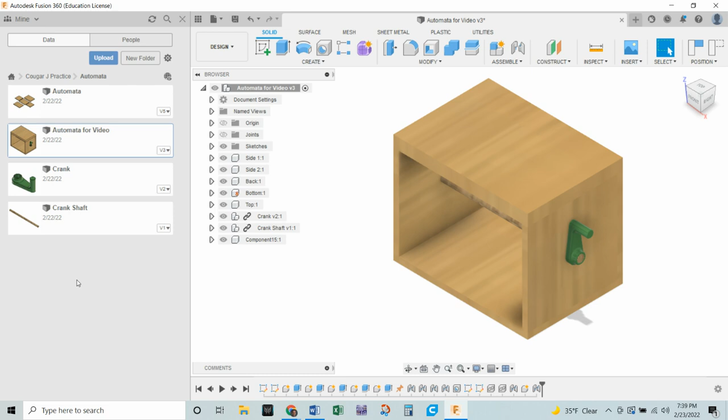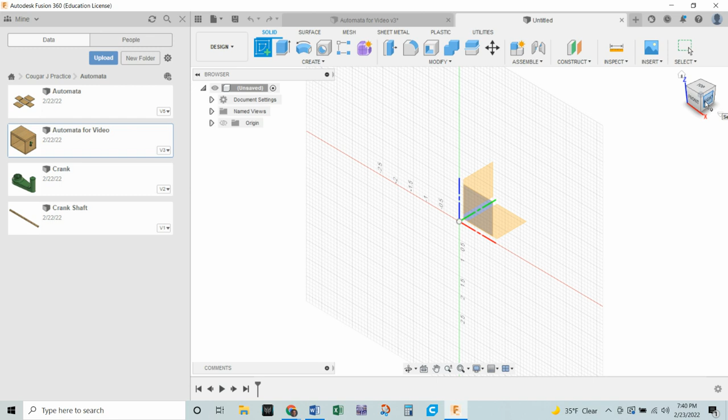So while you are in your Automata project, we're going to make a new design. We don't really need to make a new component here, so we can go ahead and just start on sketch. Now, because our front view is the opening on our box, it's best if we do the right side view, either by clicking on the view cube or clicking on that spot on those 3 planes.

If you like the grid, great. I personally turn it off. So our first one is going to be not really a cam at all, it's just a circle spinner. So we're going to start by creating a disc.

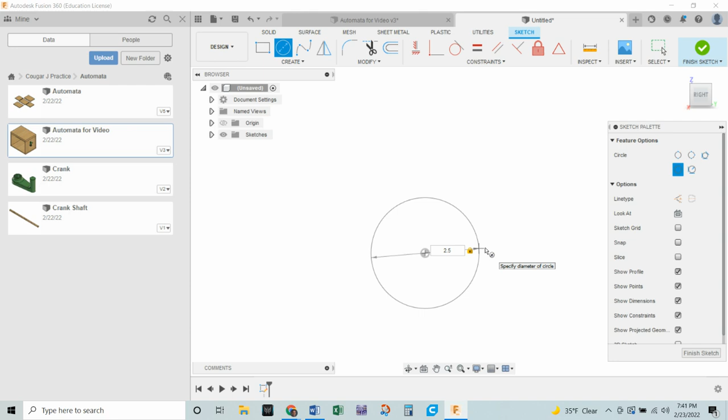Now we have 4 inches of space. What we make this is not really that critical, but let's go ahead and just make it 2.5 inches, seems to be a good size for this. So we'll make that circle 2.5, and there will be another concentric circle right in the middle that is the size of our shaft, for us is 5/16.

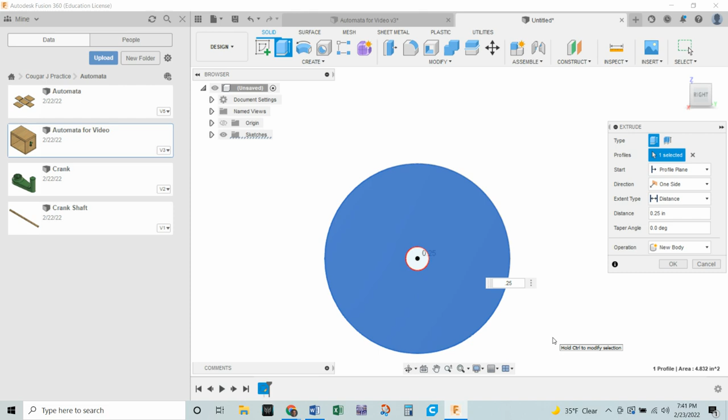If you're watching this video, you may have something different. And then finally, we can finish our sketch and extrude that part to 0.25, that's about the approximate thickness of the material that we're going to use.

All right, so we have our first, let's call this circle cam, even though it's not really a cam, but we'll designate it as a cam anyway. So we're going to save this and call it circle cam.

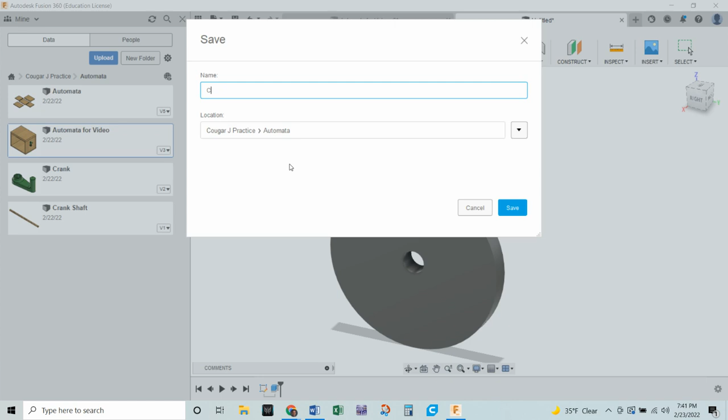Now, we're going to go in order of difficulty here. That's the easiest one to make. The next easiest one is going to be this polygon cam, because we don't really need to do any parametrics to it. So let's start a new file again.

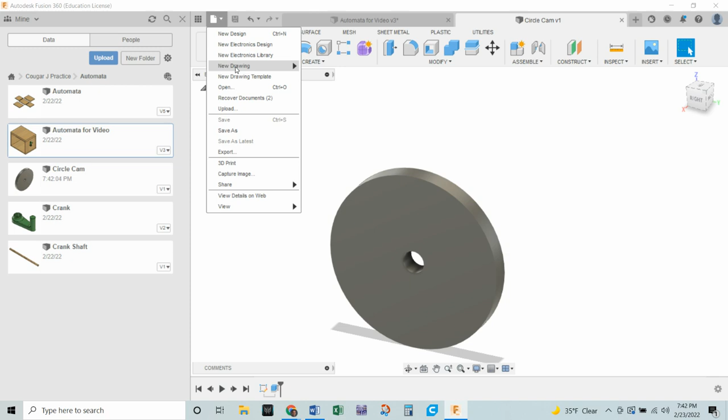I'm going to again sketch in the right side view, and this time we're going to create a polygon. Now, in the drop-down menu, we want an inscribed polygon because we want to know what the maximum diameter ever could be to the points.

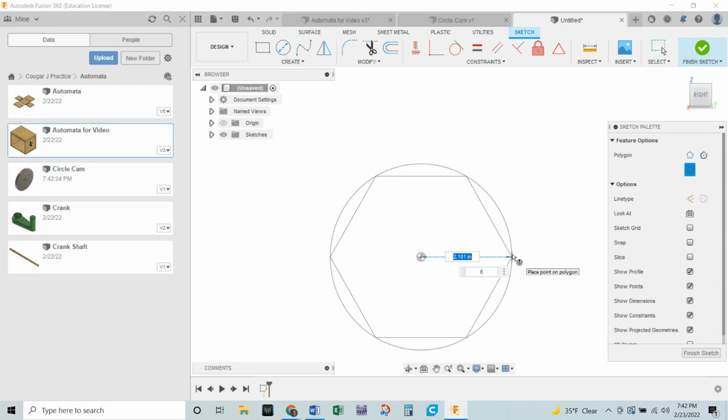So when we get an inscribed polygon, we're going to pull that guy up, and as you pull with your mouse, go straight right, it'll kind of snap to head towards the right. And again, now we've got a radius this time instead of a diameter, so we're going to make that radius 1.25. Now it already is a hexagon, which is what we want.

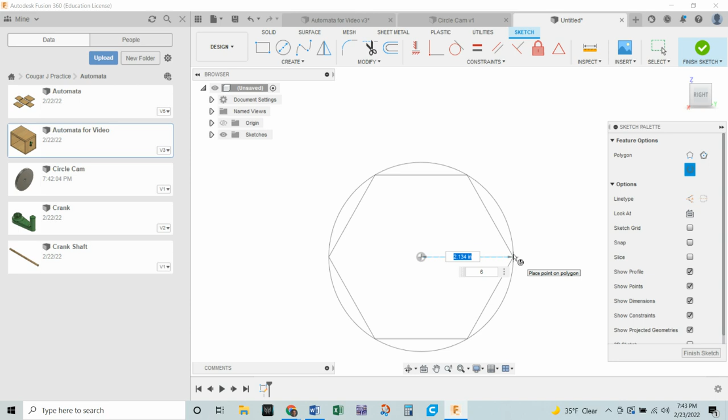Tab goes back and forth. We could make it a 9-sided or a pentagon, but we do want 6 sides, we want a hexagon. Tab gets us over to the dimension, so we want that radius to be 1.25.

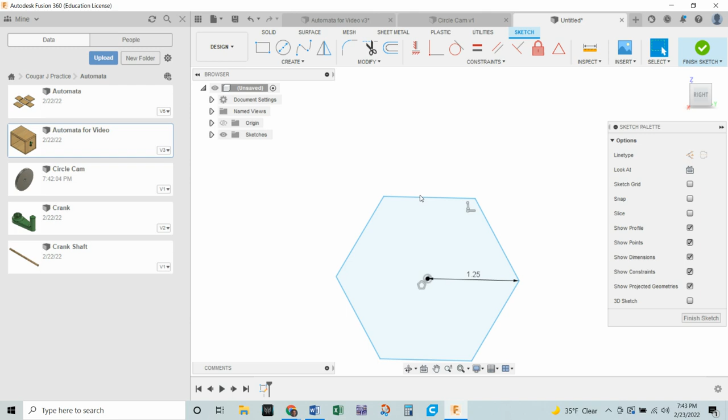All right, now normally this would be black, but the way polygons work is you can actually move them around. So in order to fully constrain this, come up to your horizontal constraint and just snap on that line. Actually, you might have to hit the line first and then hit horizontal, and now it locks it down and makes it fully constrained.

Second thing we're going to do is put that 5/16 hole in the middle again, or a circle that will represent that, 5/16. Enter, finish our sketch, and extrude again to 0.25. And we have now our polygon cam.

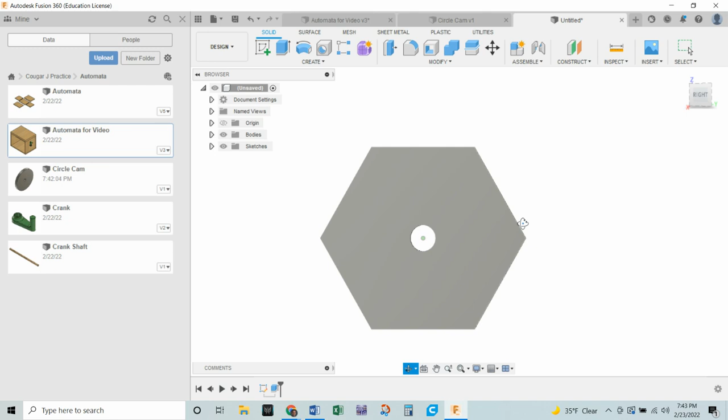So again, save, polygon cam. So far so good.

All right, now the next one's going to be a little different and take a little bit more time. We've built this one, we've built this one. Now you'll notice that this one is called, that it's got parametric dimensions.

Parametric means that when we're doing parametric modeling, para means near or next to, metric means measurement. So we're going to put measurements next to each other essentially and have one relate to the other. So that's what this means. So let's talk about how this works.

You'll notice right here we have this through hole, which is going to be 5/16. We want that to be 5/16 no matter what. We've got a diameter here that I want to be, I'll call it 2 inches this time, and we can play with it a little bit later. And then the distance between this point and the center point of that circle is going to be the diameter divided by 4. So here's how we're going to set this thing up.

Let's start by again creating a new design.

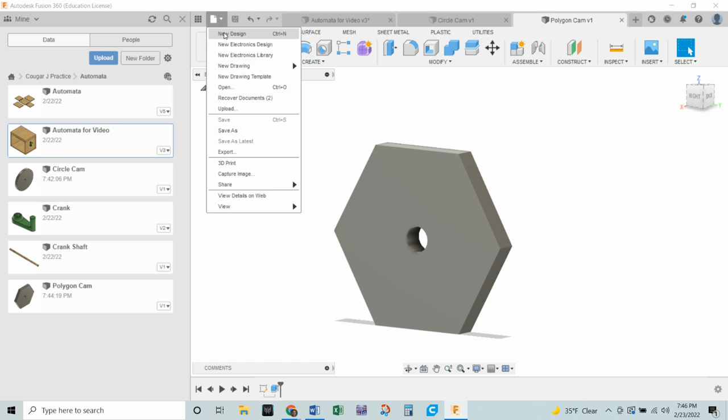Okay, now while we are in this new design, we're going to do something a little bit different. Let me get rid of my library here. Under the Modify tab is Change Parameters. We're going to click on that, and that's going to open up this Parameters window.

Right now we haven't done anything yet, so there's no parameters in here. We're going to create a couple of user parameters by clicking on this little plus symbol. Now we need to enter a name. So the first one's going to be easy. In the curriculum, they call it nominal diameter. I'm just going to call it diameter.

Our units are in inches, and now we need to insert an expression. What is that going to be? For right now, we're just going to enter 2, which is going to be 2 inches, and it's going to make that diameter 2. Now anything I refer to as diameter is going to be 2 inches.

Now we're going to create another one, and I'm going to call that hole, HOLELOC, for location. Now I need to remember that because I'm going to have to type that in again later. And what that's going to be is it's going to be the diameter divided by 4.

Now I'm not sure why that's red. Oh, because I missed an E in there. It should turn black once you've spelled it right. So I've got the diameter divided by 4 so that when I'm looking at this, yeah, that's diameter divided by 4. That's what I want.

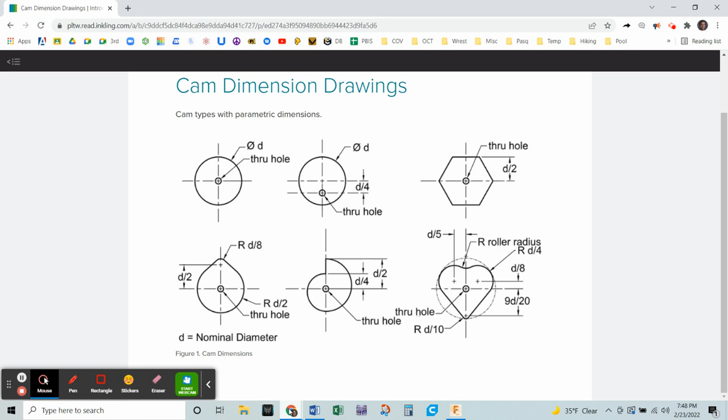Okay, and we click OK. Now there's going to be some other things in here that we're going to have too, but we're not going to deal with that right now. So we've got diameter that's 2 inches and the hole location, which is the diameter divided by 4. Click OK. All right, so here we go with actually building this thing.

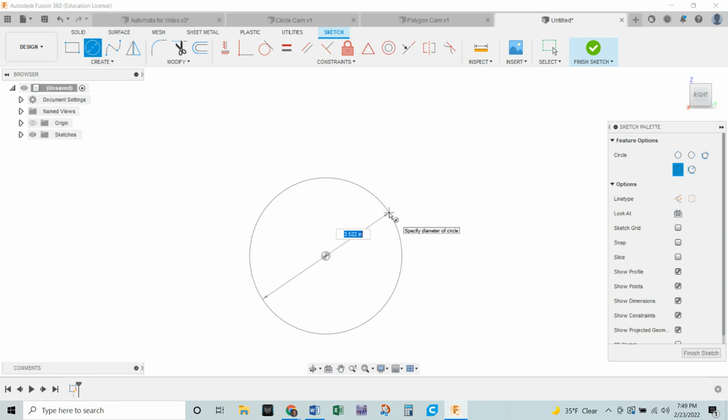Okay, we're going to sketch as we have been before. We're just going to sketch on the right. And we're going to start by creating our outside diameter hole. Instead of typing in a number on this, I clicked on the center and I'm going to start typing in diameter. It will pop up for me and I can actually just click on it and hit enter. Now this little f of x means that it's relating to that table.

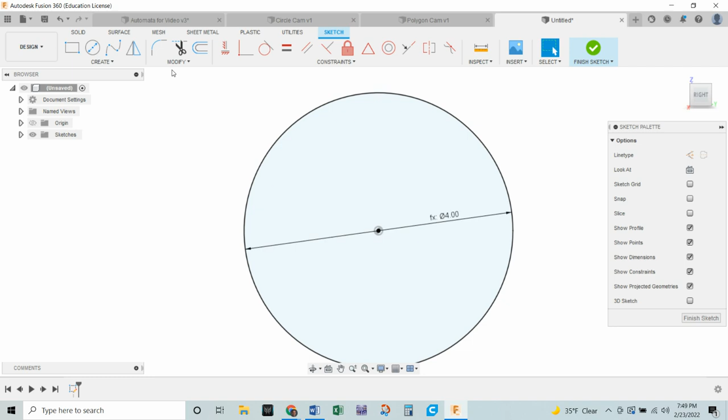If we go back to the table, we go back to our change parameters, and let's say I make that 4 inches. Okay, notice that it will change that, because it's based on the parameter table and not what I entered. So let's go back and change that. I'm going to change my expression back to 2.

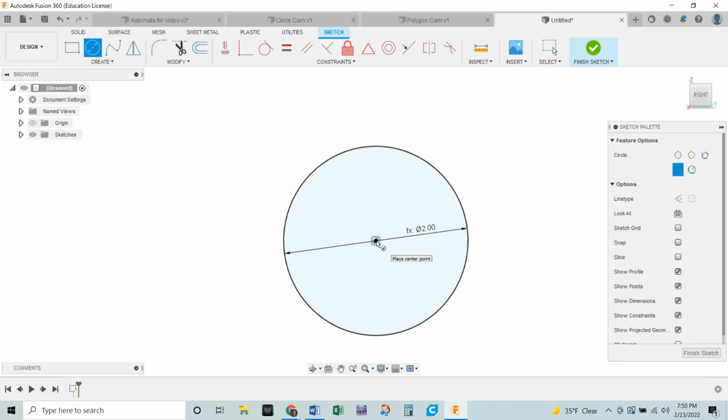Okay, and we've got that. Now we're going to create our hole down here. We're going to do a couple little things. We're going to create this hole. I'm going to hover over that center point, go down here, and of course that diameter is going to be 5/16. I don't want that to change. That's why it's not in the parameter table.

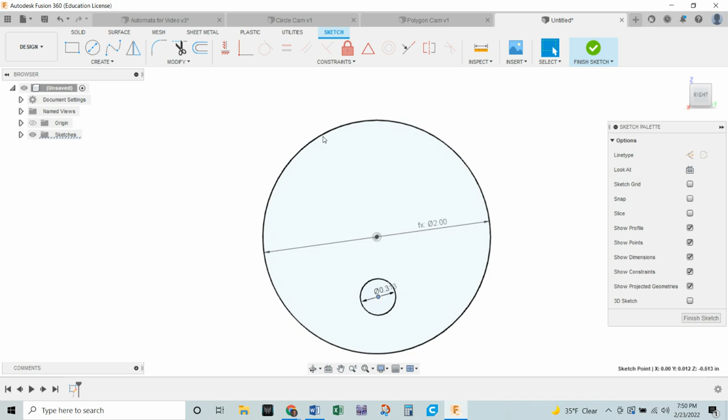I want it to always be 5/16, but I want its location to be the diameter divided by 4. But first, before we do this, remember this can move around. So let's do our horizontal constraint and vertical constraint and make the center point of this and the center point of this vertical to each other.

Okay, good. Now it's still blue because I haven't created a dimension, excuse me. So I'm not sure why it's showing that black. Oh, it's blue. All right, we're going to hit D for dimension now.

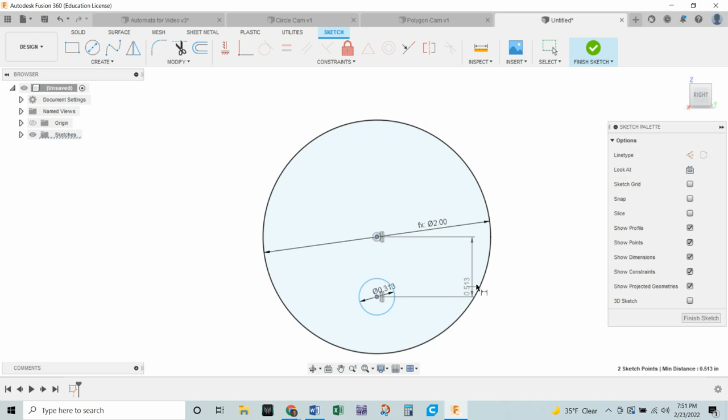And now we're going to go from here to here. Click, and that is going to be hole location. So again, once you start typing it, it'll be in there, and I can type in there, hit enter, and now that is 1/4 of the diameter.

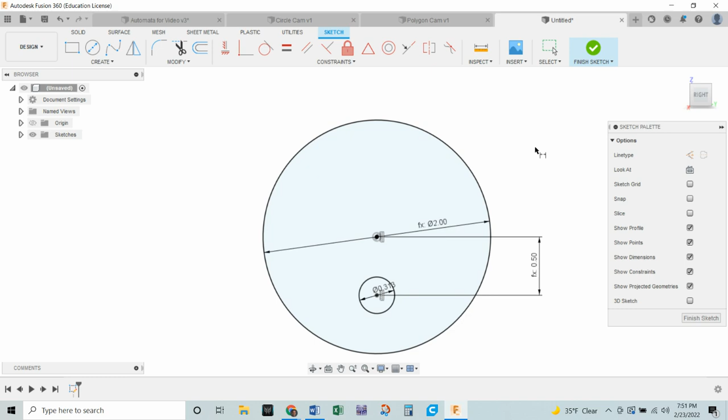Now if I want to change things, it will change it, but let's go ahead and finish our sketch, and we're going to extrude to the same thing we've been doing the whole time, 0.25, because that's the thickness of our material that we're using. Now let me show you why this is important.

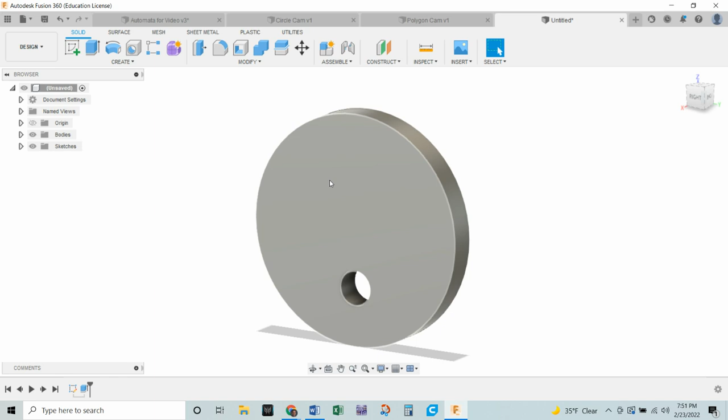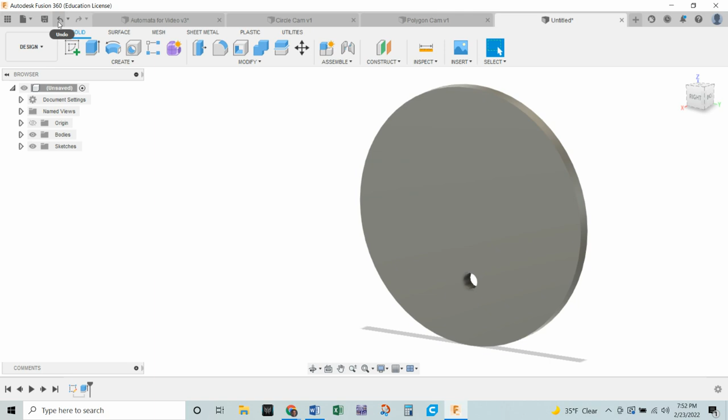Later, let's say we wanted to get a little more rise out of our riser using this cam, and we've got enough room to do that, but I don't want to change the whole thing. All I have to do is go back into modify, change parameters, and make this a little bit bigger. For demonstration purposes, I'm going to make it 5 just to show you what happens. Notice that the hole has not changed size, it's still 5/16, but its location relative to the diameter is still 1/4 of the diameter, no matter how big I make that. So I'm going to undo that last change.

We're going to save this as an eccentric cam, ECCENTRIC. This kind of moves your riser slowly up and down, kind of smoothly.

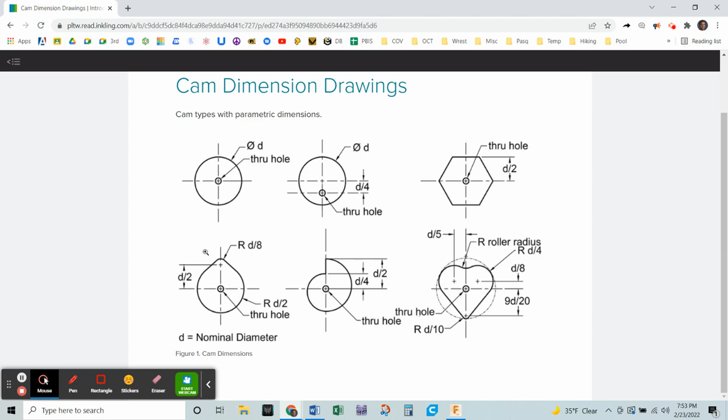All right, 3 cams so far. Time to start with our next one, which is going to be the pear cam. The pear cam's a little bit different for us. We're going to do a different design than this kind of small little nub, which will barely just lift something up. I've got a different way of doing that. We are going to have a little bit different way of lifting it, but we will make this thing work. It's a little more complicated. All right, we want a new design.

As always, we're going to sketch on the right side. Now I'm going to set up my parameter table again, but I need to think about it for a moment. All right, here we go. First of all, we're going to start off with the biggest part of the cam. Actually, first of all, we're going to set up our parameters.

Let's go modify, change parameters. We're going to add a user parameter. As we did last time, we're going to call something a diameter, and we're going to make that again 2 inches.

We're going to create another one, and you just have to trust me that I know where I'm going. We're going to call this lobe height. Lobe is the part of the cam that raises something up. So I'm going to call it lobe height, LOBEHT. Now we're going to do a little different math. We're going to make this diameter, using the asterisk to say times, and I'm going to make it times 1.5. Now, we may change that later, but for now that's going to be fine.

And we're going to do one more called small arc, SMARC, small arc, and that is going to be the diameter divided by 4. Diameter slash 4. Now I've got my user parameters that I want to use.

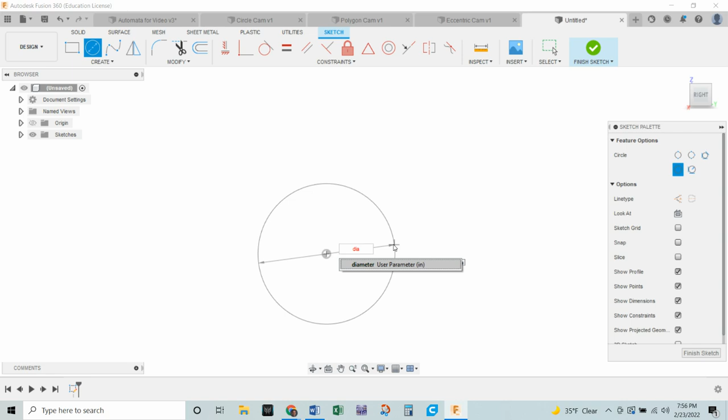Okay, so here we go. Start by making a circle. We're going to make that diameter. Once you start typing, it'll be there for you to click on. Enter. Now in the middle of that diameter, we're going to put our 5/16 hole, just like we've been doing, 5/16. We want that to always stay the same.

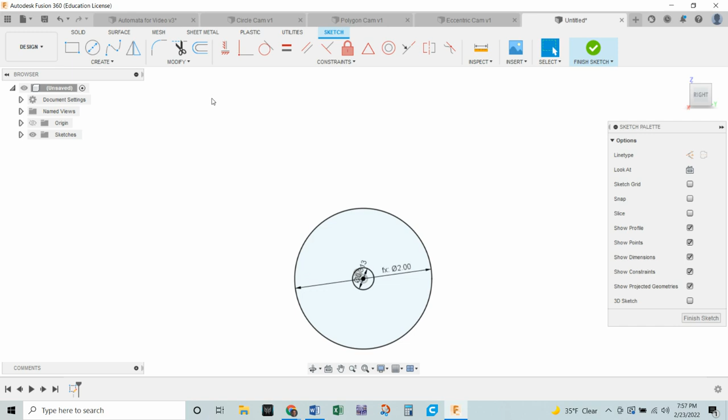Now, up here somewhere is going to be another circle. I don't know exactly where the middle is going to be, I'll put it just above the height. Now, the diameter of this thing is going to be what I just called lobe height. Oh, I'm sorry, actually I'm not doing that, my bad. I'm going to call that the small arc, I'm going to make it a diameter.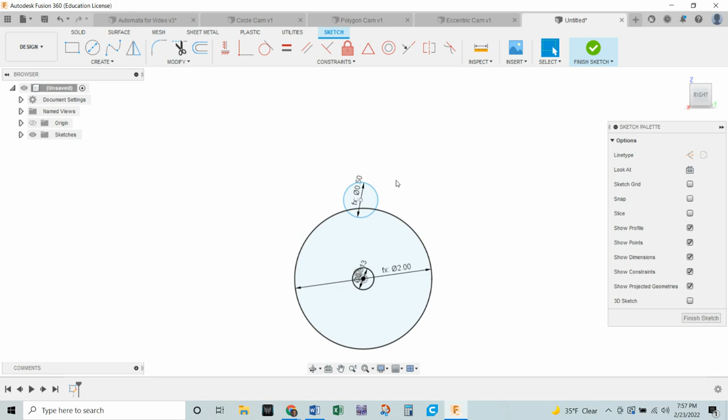Enter. Okay, now I can already tell that I don't want that to be quite that small. So I'm going to go back and change my parameters. So it's the diameter divided by 4, I'm going to change that to the diameter divided by 3. Okay, yeah, that looks a lot better.

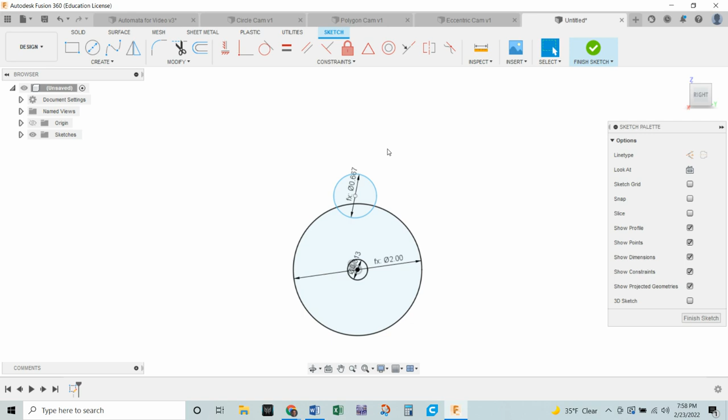All right, now before we get moving on, this is really important, because again, this circle can move anywhere. So I'm going to do my vertical constraint to make the center point of that and the center point of that aligned. Okay, now it can still move up and down though.

So one of the next things we're going to do is a dimension, D for dimension, and we're going to go from—oops, I'm making another mistake here. So another thing I want to do is I need to put a point on top of this circle. So we're going to create a point. We're going to go up here, coincident, that little X means we're being coincident, okay? And I need that point to be, again, vertically constrained, that point to the middle.

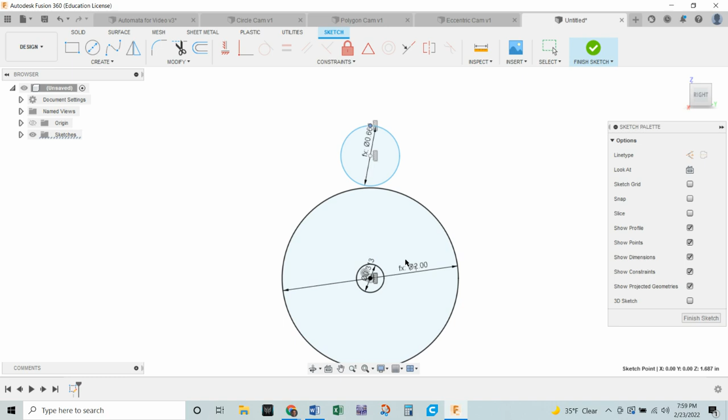I could have done it here too, but just to keep myself straight, that point is at the very top. Now I can do my dimension, D for dimension, and we're going to go from that point to the center, click, and that is going to be the lobe height.

Start typing, click, enter. Okay, that is way up there. I can tell that I did that too much. I don't think I want it to be 1.5. I think I want it to be 1.25. Let's go...

Back down here because I want it to be the diameter. This is why parameters are great. I can change just the things I want to change. Let's try 1.25.

See how that looks. That's looking a little bit better, but still I think that's going to cause us some problems when we go to work on this. Let's go one more time with modify, change parameters, okay, and we're going to call it 1 times 1.125.

We'll go 1.125, and we'll leave it at that. We can make some changes later. So this is so far what we've got. Everything should be black. If it's not, that means you didn't enter something in. You might need to go back.

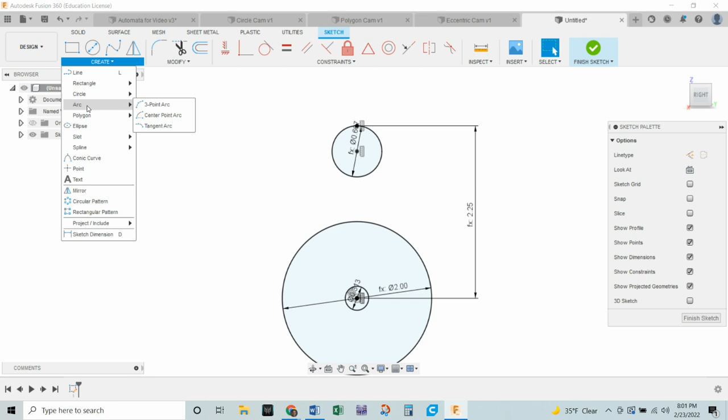Now the next part's going to be a little bit tricky. Rather than making straight lines that make the riser hard to follow, we're going to use some arcs. We're going to do a 3-point arc. Create arc, 3-point arc. Now, watch carefully what happens.

I'm going to hover over the middle, not clicking yet. Go to where I'm lined up. We're going to click to make coincident. I'm not sure why this is not showing up yet. I'm going to click the other end, which is coincident to this circle. It's right about just a little above the center point. Click, and then we're going to pull that out.

Now, at some point, if you're moving this around, see that tangent constraint show up? I want that tangent constraint there. So I'm going to go until the tangent constraint shows up.

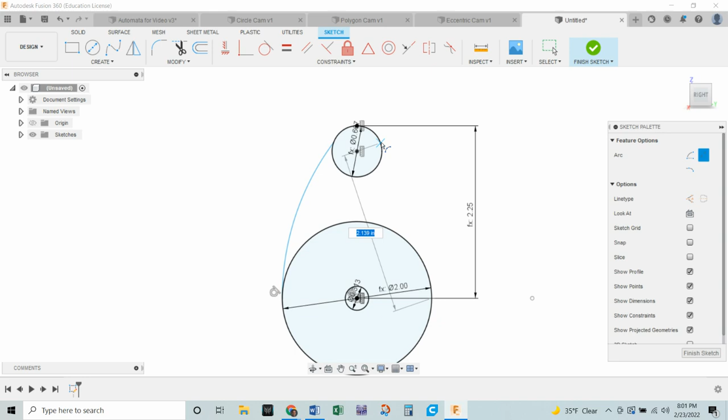Perfect. We're going to do the same thing on the other side. We're going to hover over, see that little X there, click, come up just above the center point, click, and we're going to go out, and I'm going to move my mouse until I see that tangent constraint show up at the bottom of the line. Click.

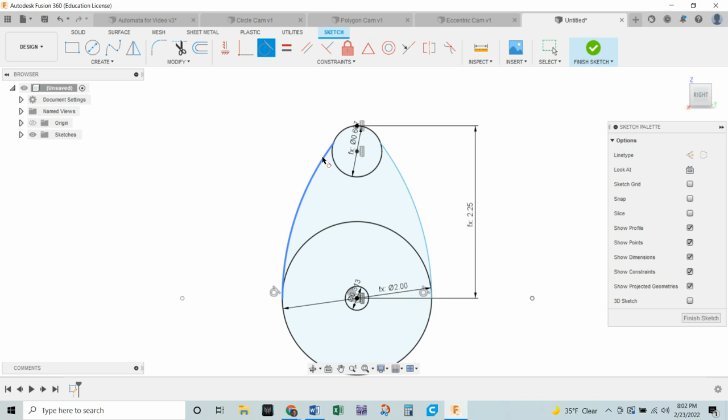Now, the last thing we are going to do is make some tangent constraints, tangent, and make this arc tangent to that line, and this arc tangent to that line. All right, and now we have our pear-shaped cam.

Now, this again is kind of going crazy with the height here, so I'm going to make it a little bit different. Sorry that I keep doing this, but that's part of playing around with this. I can tell that this is going to have a really hard time pushing that riser.

I'm going to go one more time to change parameters and make this, let's make it a little less than 1. Let's make it times 0.9. Let's see what that looks like. Okay, that's looking a lot better. That looks like something that'll actually be able to work.

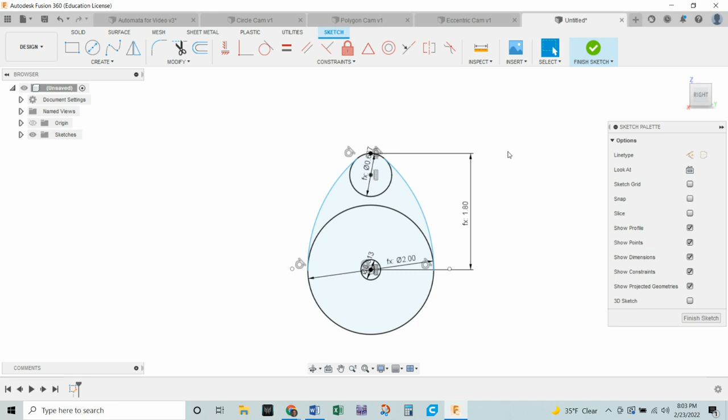All right, so now that we've got this done, I'm not sure why this arc is blue. It shouldn't be blue because I can't... oh, I know why. I need to make one more adjustment here. Okay, so we made these points across, but they aren't aligned.

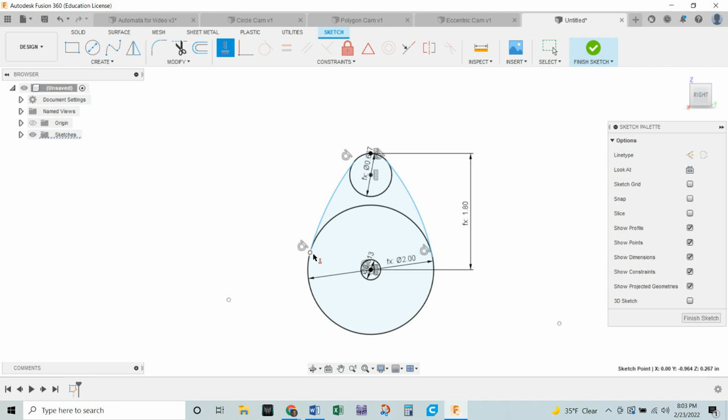So let's do that. We're going to make a horizontal constraint this time between this point and the center, and then on the other side, that point and the center. There we go. Now everything is lined up and good.

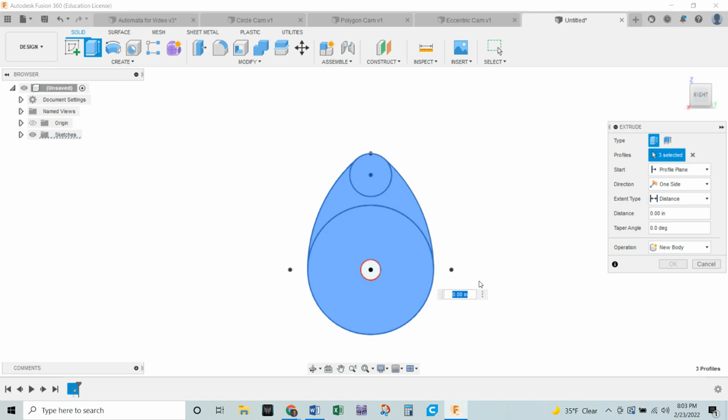All right, so finally we can finish sketch, and we're going to extrude everything except the hole in the middle. So we're going to extrude this and that to 0.25 as we've done before. Excellent, that's looking really, really good. All right, we're going to save that as pear cam.

All right, excellent work so far, folks. I think we'll stop this video here. The next one is going to be how to make the snail cam, which is a little bit more complicated. So if you have time to get to that, great. If not, we've at least built 4 of our cams so far in our project.

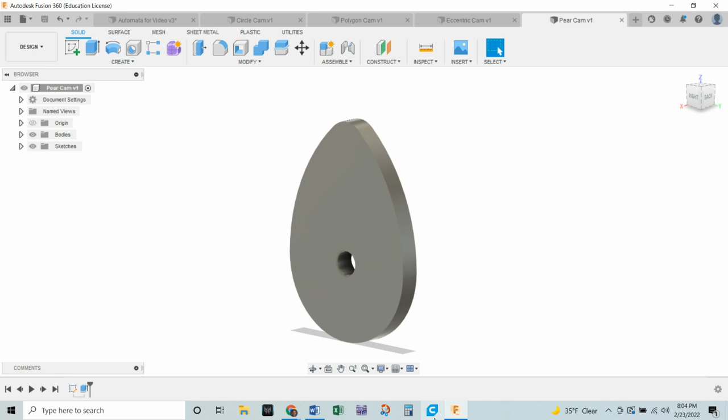And we've got, we've made 3 of our cams. Our eccentric cam, our spinner. Oh, no, we've made 4. There's our circle cam, eccentric cam, pear cam, polygon cam. Next up, snail cam. We'll see you later for that one.